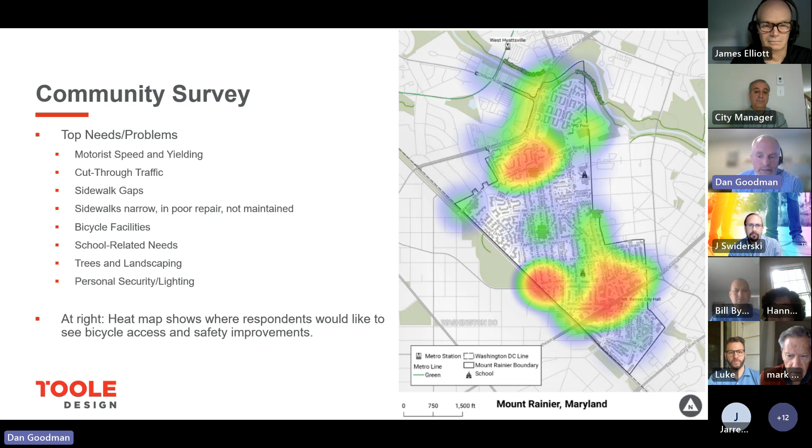And so this is just one example, and I mentioned that all of the results are summarized in an existing conditions report. But we asked the community kind of the top needs for bicycle access safety improvements. And so what you see on the right is a heat map that shows where respondents would like to see bicycle access and safety improvements. Some of the top needs also that were identified in the community survey were cut through traffic, motorist speeding, and school-related needs. And so those are all things that you'll see very clearly delineated in all the policies and project ideas that we'll be discussing.

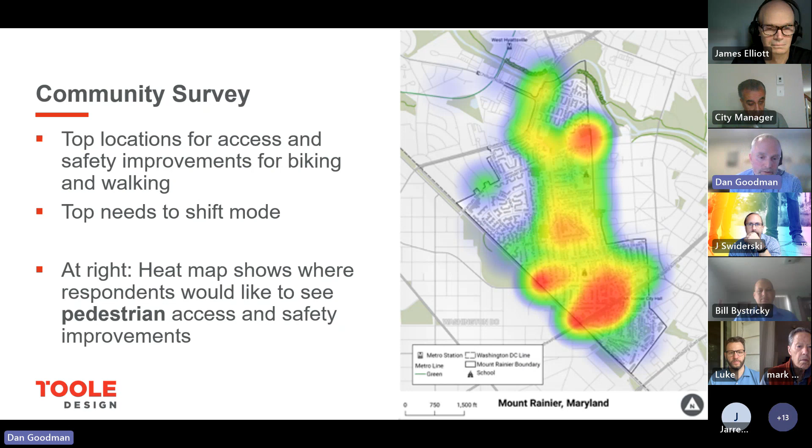This is another example focusing specifically on pedestrian access and safety improvements. And so we did ask for ideas on top locations for safety and access improvements for people walking. And we asked, what would you need in order to choose to walk rather than drive? And we've collected all that information. And what is shown on the screen is a heat map that shows where respondents would like to see pedestrian access and safety improvements. And one thing I want to point out and acknowledge is that this reflects the feedback of the people that participated in the survey. So it's one of many inputs that we're building into our study process.

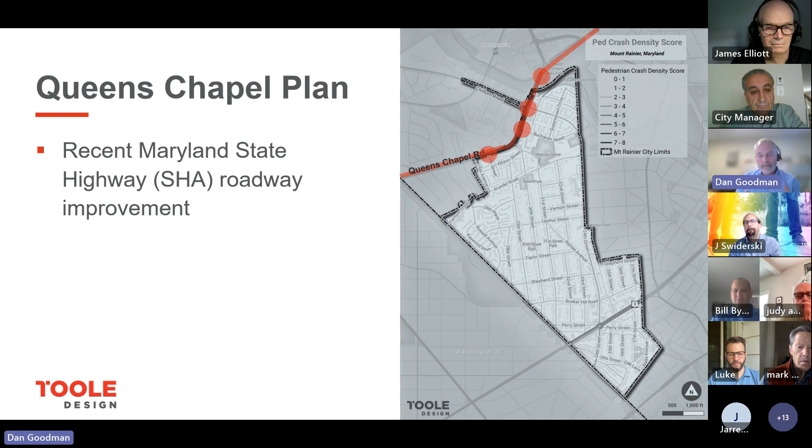So another part of the planning context for this study, as everyone knows, is that Maryland SHA, the State Highway Administration, is also working on a big project on Queens Chapel Road, and so that's something that we are factoring into our study process. You'll see in the crash analysis findings that is one of the big problem locations. That's where crashes are occurring. And so the fact that SHA is wrapping up a project now is a really important development. The improvements that they're doing as part of that project are gonna help the safety story, and so that's a really important part of what we're doing, and we want to fold in what we're doing into that thing that's already happening right now.

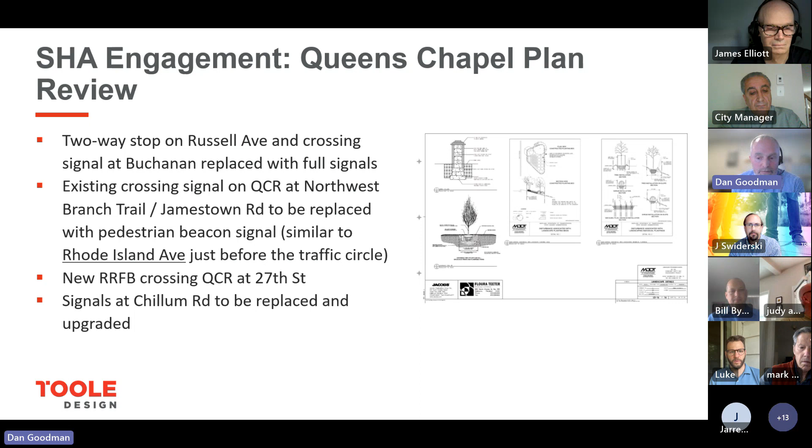I'll say just a few things about the changes that are coming as part of that project. And I'm sure everyone here probably has experienced the construction of that project. But I think that the positive side is what you see on the screen, which is a two-way stop on Russell Ave and a crossing signal at Buchanan are being replaced with a full traffic signal. There's an existing crossing signal on Queens Chapel Road at the Northwest Branch Trail, and so that's going to be upgraded and improved. There's a new rectangular rapid flashing beacon at Queens Chapel and 27th, which is going to improve the pedestrian crossing condition at that location. And then existing signals at Chillum Road are being replaced and upgraded.

A few other important things about that SHA project on Queens Chapel Road. The speed limits are being reduced from 35 to 30. The crosswalks are being marked with high visibility crosswalk markings. The slip ramps are being removed at Queens Chapel and Chillum and 30th. And then bike lane widths are generally going to vary between 6 and 5 feet between 30th and Buchanan. So important multimodal safety improvements, things that will help the overall picture that you'll see in the crash analysis findings, and things that we intend to build on through the projects that we identify in this effort.

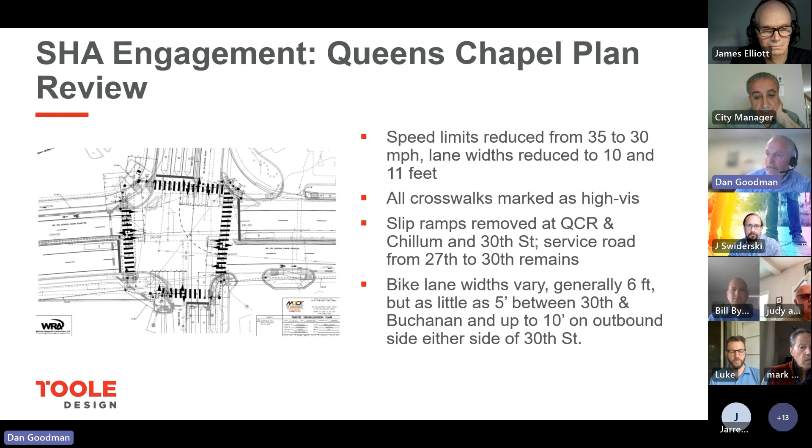So with that, I'd like to pass to my colleague Jay Swiderski to walk us through the findings of our crash analysis that are going to frame up our discussion of policy and projects that'll come next. So Jay. Thanks. So just to start with, a note on our methodology. Sorry, next slide now.

So we looked at data from Maryland and DC, which have open data portals. So we pulled down data on all crashes which occurred in the city of Mount Rainier or on the section of Eastern Avenue bordering the city, and various state and county sources about the roads where they occurred, such as how many lanes and so forth. Unfortunately, the DC crash data contains a lot less information than Maryland's, which is limiting our initial analysis, but we are going to try to go back and look more in depth at the Maryland data and make sure that we have as full a picture as we can get.

But another critical limitation is that this data is based on police crash reports, which may miss some number of crashes, but particularly those involving people walking or riding a bike, and especially people in certain communities who either don't trust police or don't feel that they can afford to call an ambulance, and so may try not to report that. And unfortunately, that means that we don't have the data about them.

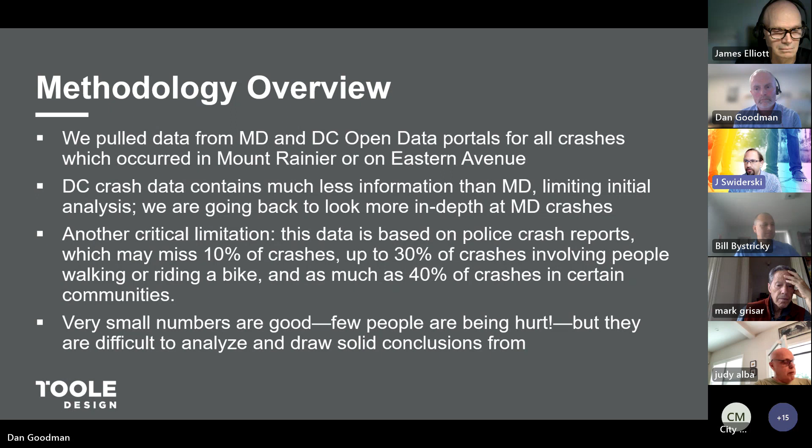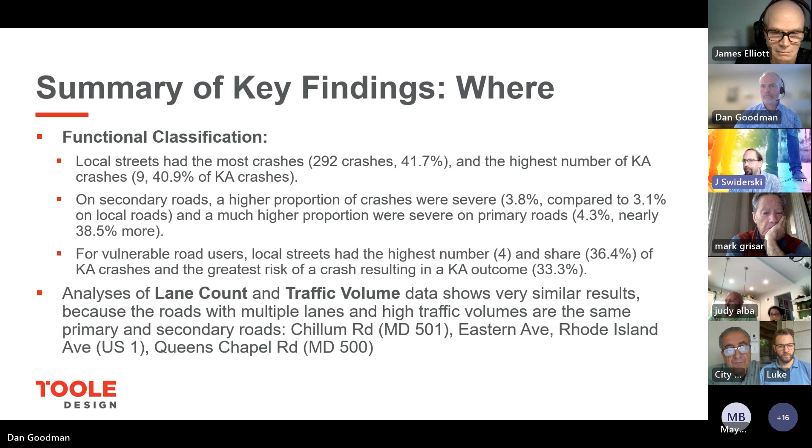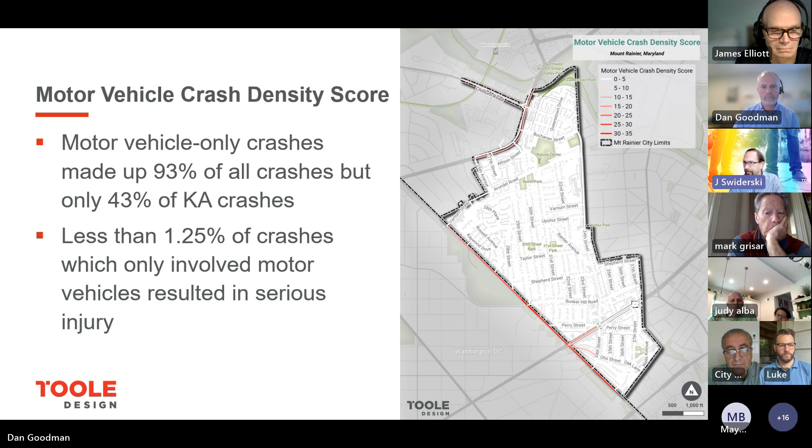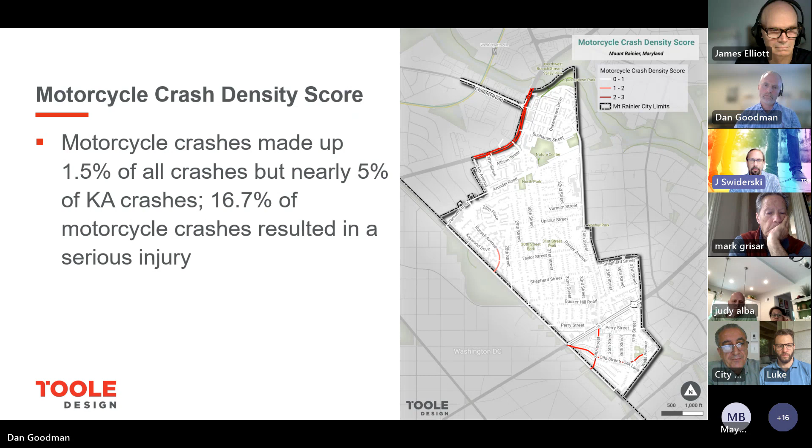Next, please. Looking at motorcycle crashes, again, we see a significant concentration on Queens Chapel Road, with a smaller concentration in the southern part of the city on Otis Street and 34th Street. And again, motorcycles were a smaller percentage of crashes, but a significantly higher proportion of KA crashes.

Now, Dan, moving on to the bike crashes. Again, a major concentration on Rhode Island Avenue west of the Circle and on Eastern, and a smaller concentration on Chillum, and again, a significantly higher proportion of bike crashes resulting in serious injury than the crashes overall.

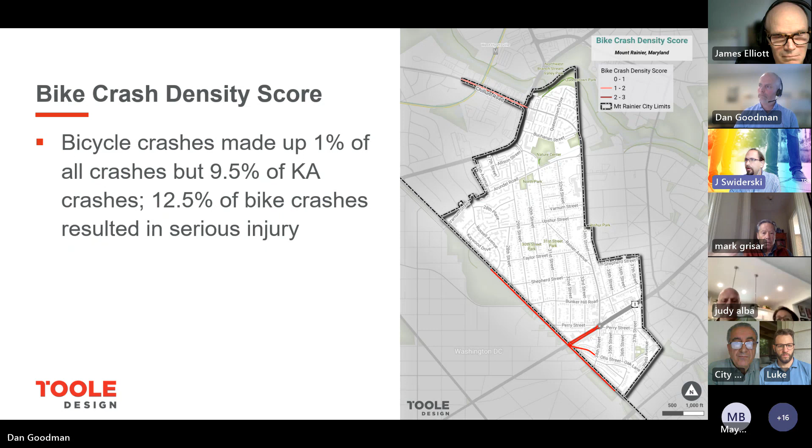Similarly for pedestrians. Next slide, please. Pedestrian crashes were 4.5% of all crashes, but over 40% of serious injury crashes. More than a quarter of pedestrian crashes resulted in a serious injury. And again, the concentration seems to be on Queens Chapel and Chillum roads, with smaller concentrations on Rhode Island and Eastern.

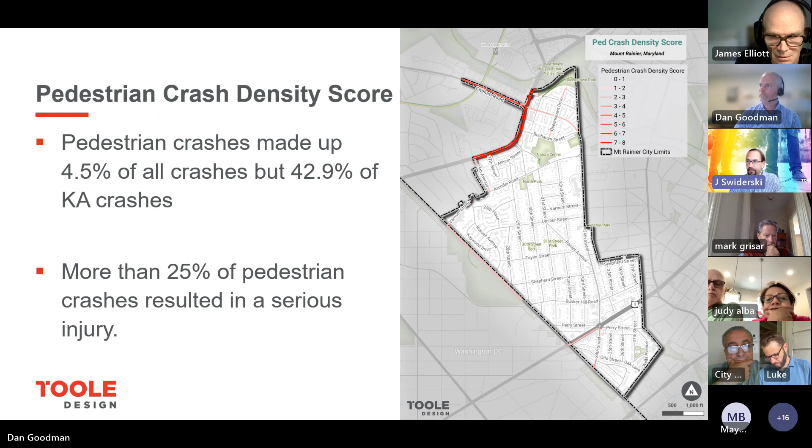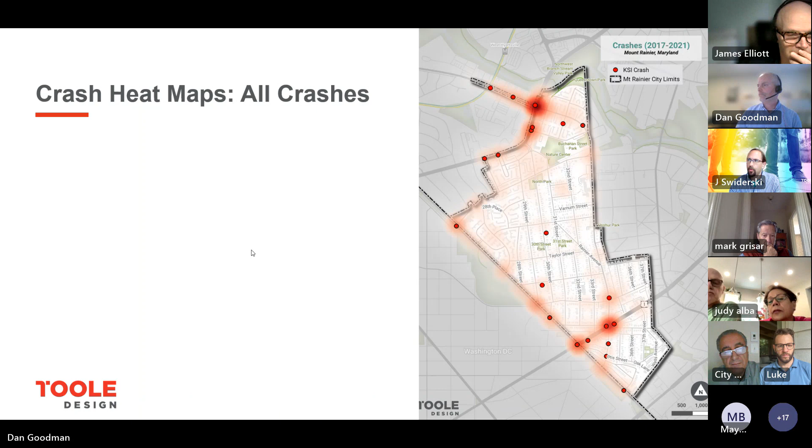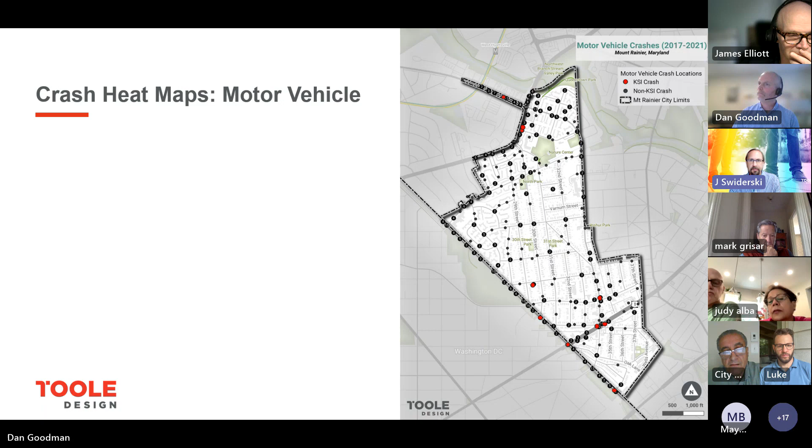We also looked at a heat map of all crashes in the city. And so you'll see, similarly, the concentrations and the significant injuries occurring primarily on Rhode Island Avenue and Queens Chapel and Chillum. And we wanted to include these next couple maps to show that the largest numbers of crashes are occurring on these major roads at the edges of the city. But we do have incidents occurring really throughout the city.

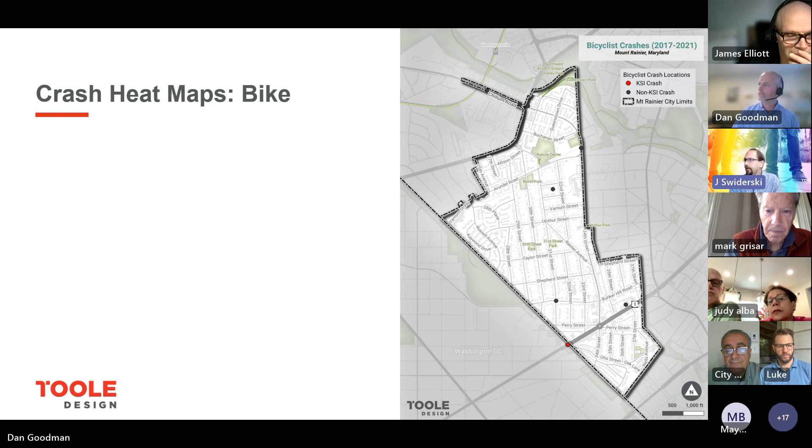So the motor vehicle crashes are spread across the city. Motorcycles in a fewer number but particularly concentrated. And then bike and pedestrian also occurring throughout the city.

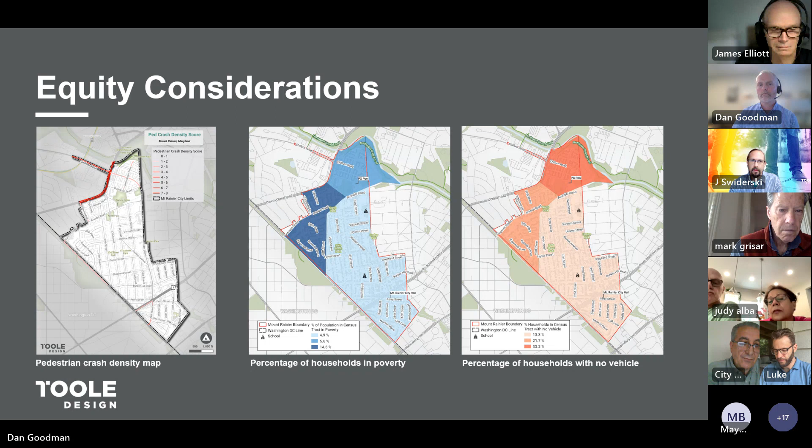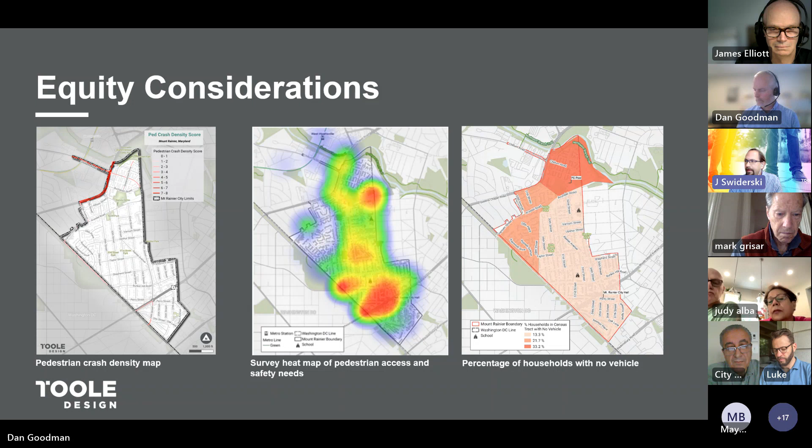And so when we compare that with the crash density map, especially for pedestrians, we see that the pedestrian crashes are concentrated in the area where people, and particularly people who have no vehicle, are concentrated. And if we go next to, Dan mentioned the survey that we did earlier in the year showing where people would like to see access and safety needs. In many ways, that map doesn't match. And that doesn't mean that those areas aren't also problematic, but it does suggest perhaps we need to do better at hearing from people in the north and northwest part of the city.

And I believe next is Jim for policy options. And do we want to stop and allow people to ask questions at this point? Some questions have come in through the chat, and I imagine there are others. Sure, we can do that.

Okay. So one of the questions I wanted to acknowledge that came in through the chat, I don't know if people are monitoring it closely, is why we are reporting on fatal and serious injury crashes or referring to them together.

And it's because a serious injury crash, in the context of Vision Zero, is almost the same thing as a fatal crash—it could easily have become one. So when we say there are no fatal crashes, but Jay keeps referring to fatal and serious injury crashes, that's why. Also, those numbers don't get updated if somebody's condition changes. So if, as we saw recently in DC, somebody is seriously hurt in a crash and dies several months later, that does not necessarily get updated in these statistics to reflect that the crash was eventually fatal.

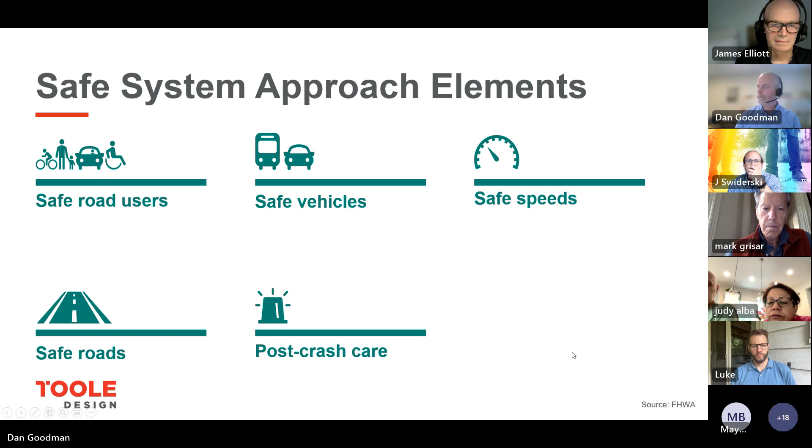So we have developed some preliminary ideas based on the safe system approach elements that I just mentioned. These are preliminary, and I'd be interested in people's feedback about these ideas. Maybe we'll save that until we get through all of these. But I just want to highlight that these are preliminary.

One idea related to safe road users is the idea of expanding the safe routes to school programs at each of the schools. We met with the Vision Zero task force earlier in the week and talked about what's currently happening at the schools. In the initial response, I asked whether the schools had safe routes to school programs already. People weren't sure, but when we started talking about the types of activities the schools were already engaged in, participating in walk to school days, for example, it emerged that Stone and Rainier Elementary are engaged in a number of safe routes to school activities. So it could be a question of expanding those activities.

And I should back up and really introduce what Safe Routes to School is. Safe Routes to School is a federal program that is locally administered to encourage and enable students in grades K through 12 to walk and bike to school. So it's focused exclusively on walking and biking safely to school, and approaches that goal from a number of different angles through improving infrastructure, through providing encouragement activities such as walk to school days, to pedestrian safety and bicycle safety initiatives for students. So it's a comprehensive approach to enabling students to walk and bike safely to school.

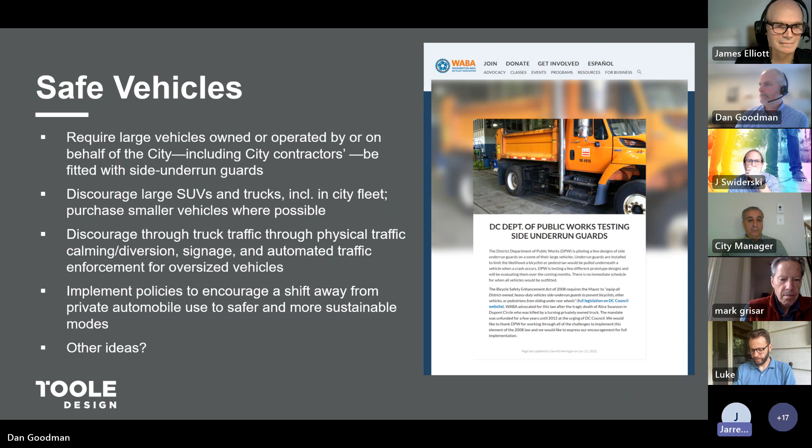Safe speeds—I mentioned that's really critical in the safe system approach. An idea here is to reduce speed limits throughout the city on all local roads to 20 miles per hour. DC recently did this, and it's something Mount Rainier can do too. My understanding from the Vision Zero Task Force is that this has been explored and determined to be possible.

Another idea is to expand the area within which school zone speed limits are applicable. There are certain rules about school zone speed limits, but the school zones in Mount Rainier are relatively small and could be expanded even within those rules.

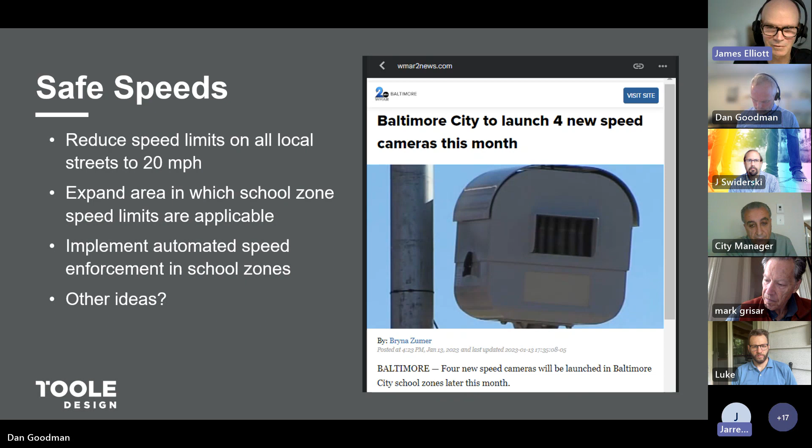A third idea is to implement automated speed enforcement in school zones and residential neighborhoods. Baltimore City, as shown in the screen clip here, has recently launched four new speed cameras in school zones. There's a law enabling cities, if they pass legislation, to install automated school zone speed limit enforcement.

Safe roadways—this is something Dan will put more detail on, but these are the bigger picture strategies the city might take to improve roadway safety on a more systemic basis. One would be to implement gateway treatments at Mount Rainier entry points. Gateways can be configured in various ways, but the goal is to signal to drivers that they are entering a different kind of zone.

That can be done with curb extensions, medians, signage, and other elements. There are a variety of locations in Mount Rainier where that might be effective. One of them is related to the photo shown here: Chillum Road, not too far from Queens Chapel Road. That's an important gateway into the city, coming from Chillum Road north of Queens Chapel, which is a four-lane road and currently quite fast, to a different kind of environment with apartment buildings. We know that quite a number of crashes are occurring on Chillum Road south of Queens Chapel, so this would help address that.

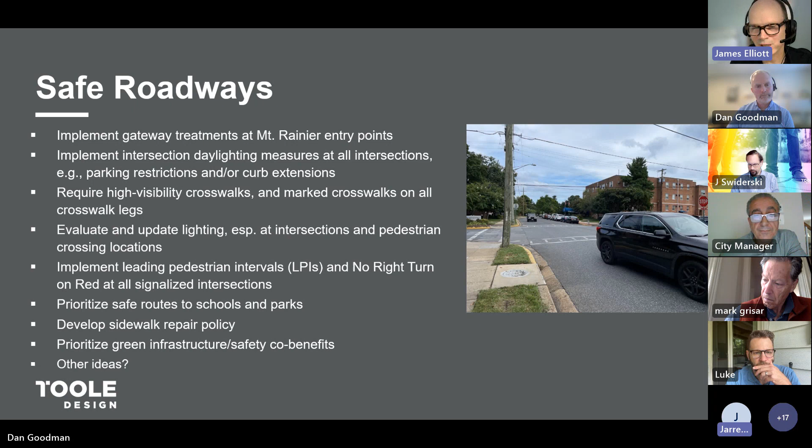Finally, as part of all of this, we understand that it's very important for the city to think about ways that green infrastructure can be incorporated into any type of improvement made throughout the city to address safety.

The final issue is post-crash care—what happens after a crash has occurred. Of course we want to focus on preventing crashes in the first place, but we also want to recognize that they may happen, and the way we respond to those crashes can affect whether a person dies or lives. One of the ways we can improve post-crash care is by doing a better job of reporting and analyzing information about crashes.

So that's one idea for the city. Another is providing training to first responders, such as police officers, on how to manage crashes better. And those are the elements associated with the safe system approach and some of the policy ideas we've developed to address them.

I'm interested in what people think about these ideas. Do certain ideas resonate with you? Is there something missing that you think would be important for the city to pursue in the future? I'm interested in hearing from people, so please feel free to unmute and let us know. And while we do that, Jay, maybe you can look through the comments and see if there's a few you'd like to lay out. But let's first open it up.

It looks like Hannah Grisar. Yes, hi, thank you. I'm curious about any evaluation... your camera lighting might not be exactly right, if you want to bump it up. Maybe that'll help. Whoop, now you're upside down. No, it'll fix, there you are. We go, okay, good. And is the mic better now? Yep, yes, it's fine, okay.

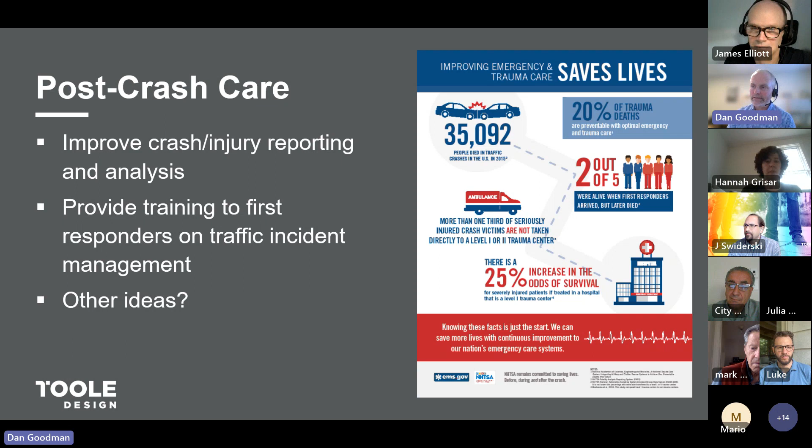Okay, I'm going to recommend that we move along because I want us to talk about some specific ideas for projects. And then we will come back and have a little bit of time to come back to any topics that we missed. So I'm going to move us along, and you can still see my screen, correct? Okay, great.

So the first thing I want to point out: we've talked about the study process. We've talked about the crash analysis findings. We've talked about the policies and program ideas. So those are all part of the story. Another really important part of the story is actual projects on the ground that can achieve the things that we're trying to achieve in this effort, everything that we've talked about so far.

One of the things that we want to do as we're thinking about what those projects are is to build off of the things that are already underway or planned, to actually start to create more of a safe multimodal network. And so we've talked about SHA's Queens Chapel plan, but I also want to point out that there's an Arundel Road Green Street project with improvements planned. There's intersection improvements at Bunker Hill and 34th, and then there's Perry Street, 31st Street intersection improvements.

And so those are things that are coming that we want to build off of as part of the projects moving forward. And so before I move on, I want to mention a couple things that we're trying to accomplish with these projects. Number one, building off of existing projects. The most important thing is improving safety. We also want to tee up sets of projects that would be appealing to the US DOT decision makers when they decide who gets SS4A money.

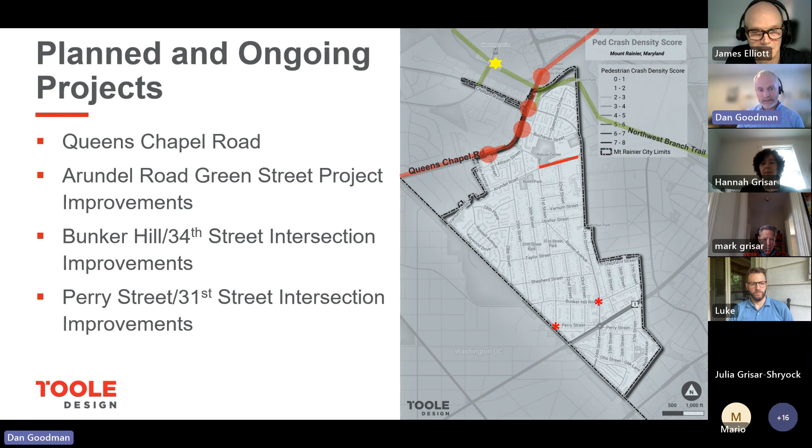And so that's also part of the story that we're trying to suss out, is the projects that help us achieve all of the different outcomes. And so the first piece that I want to mention, and you'll see a hashed box around each of the types of projects. I'm going to talk about 5 of them. So the first one is Chillum Road between the Metro Access Trail and Queens Chapel Road intersection.

So I'll talk a little bit about this concept of a road diet. What that means is a roadway reallocation. The concept that I'll show a picture of is whether we could go from 4 travel lanes, 2 in each direction, to 3 travel lanes, and then better utilize that existing space to meet the needs of all roadway users, like we've talked about. That would improve West Hyattsville Metro Rail Station access conditions.

And as part of that, we think there's an opportunity to significantly improve pedestrian safety, potentially to provide separated bicycle facilities. Access management is part of the idea. It's basically the idea that every single driveway along a corridor is a potential conflict point between a pedestrian walking along a sidewalk and a motor vehicle. And so there may be opportunities to consolidate and combine driveways so there's fewer potential conflict points. We've also talked about green infrastructure.

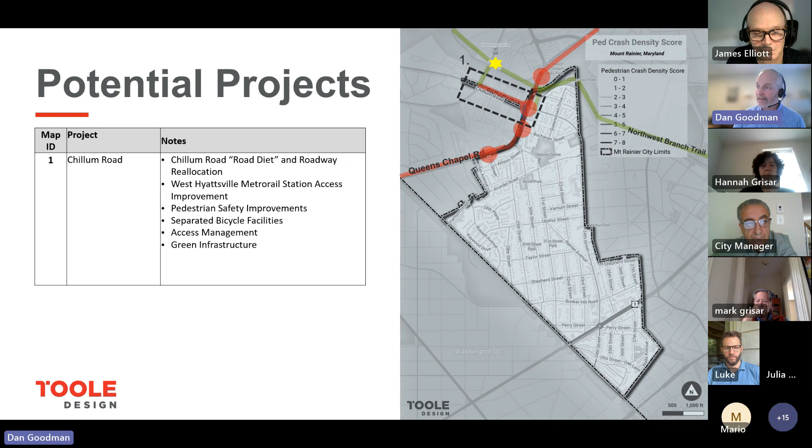But this is the section of road that you all know well, I'm sure. This is where the metro comes out from West Hyattsville. There's 2 lanes in each direction. There's a pedestrian and bicycle crossing with a crosswalk. But when we think about that overall space, one of the things that really stands out is how much of the overall roadway width is dedicated to motor vehicle travel, and what that leaves for everybody else. When you dedicate all of that space for 2 lanes in each direction, how small that sidewalk is, how there's no dedicated bicycle facilities.

And we haven't done a full detailed traffic analysis, but in our initial assessment, it looks like it's possible to go from 4 lanes to 3 lanes. And then, like I said, that would allow us to reallocate some of that space.

So this is just driving towards Queens Chapel Road, and I'll just point out the driveway condition that I talked about with all those driveways, some of them right next to each other; one property has multiple driveways. No matter what we do on the pedestrian accommodation, if there's that many turning cars, it can be pretty difficult. And so ideally we would try to consolidate some of those, but we also know things like a car wash that exists there, there's going to be a lot of movement in and out of that space, and that's a use that we just have to acknowledge and recognize and try to design around.

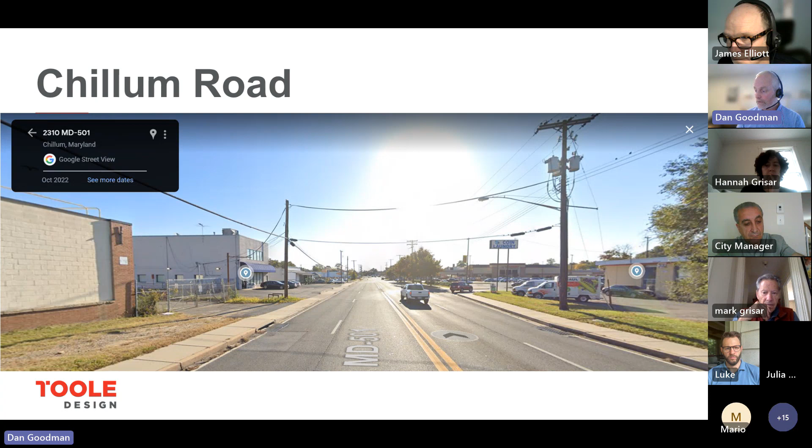So there's destinations on both sides and there's not a lot of pedestrian crossing opportunity. And so I'll mention that another really important reason to try to consolidate the number of travel lanes is that it opens up space for things like a pedestrian refuge island, so that even if there's not a signal, a pedestrian has a place to get halfway across and then assess the safety of making the next crossing.

And that's something we know through the research, which is that the longer a pedestrian is exposed to a crash, the more likely it is that they're going to get hit. It sounds pretty obvious, but if we can provide a pedestrian refuge island, it reduces that exposure, which can have a really important safety outcome.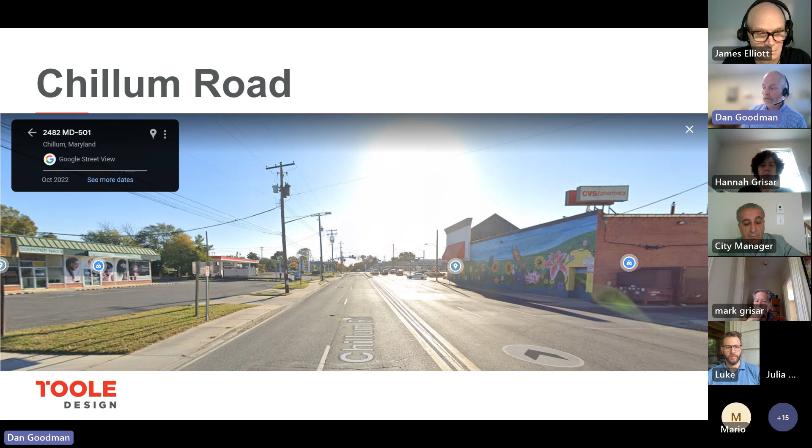And so this is then turning around and looking the other direction. And so you can see the 4 lanes, and if we can go to 3, potentially with 1 lane in each direction and a center turn lane with pedestrian crossing, there's the chance that you could have dedicated separated bicycle facilities, so a bike-only facility on the side of the road that has a vertical separation between the cars traveling and the bike lane, which is different than a traditional bike lane.

So in this case, it would be better if we can have a dedicated separated bike lane. The other thing I want to point out about that is not everybody bikes, and for people that are biking, it's going to be much more comfortable, and we know now that it is going to be safer with a separated bike lane.

But another benefit, if you think about a separated bike lane along the side of the road, is that it provides more lateral separation to the pedestrians also. And so people walking on that sidewalk will have a more comfortable experience if there's a separated bike lane there on the side of the road. And that's also a really important consideration.

So that's a first potential project idea. And maybe I'll pause for a second, see if folks want to weigh in on that concept or that idea and provide any feedback on the basic idea. We had some questions in the chat. So one is, by bicycle facilities, do you mean dedicated bicycle lanes along the roadway? Yes. Yep.

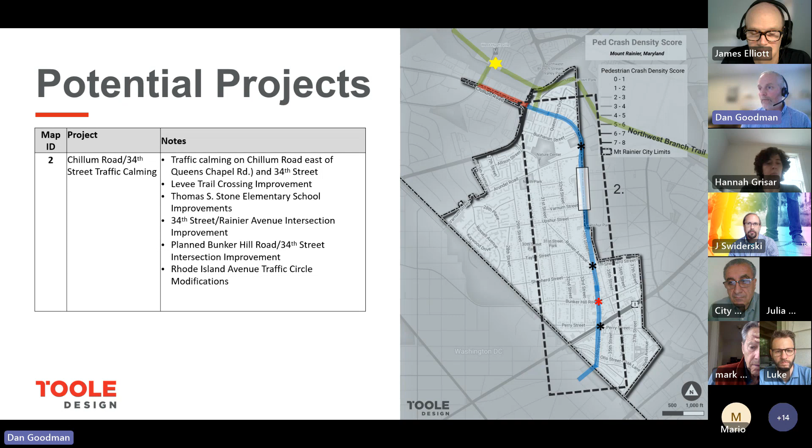There's the 34th Street and Rainier Avenue intersection. We see some opportunities for green infrastructure there, also recognizing that it's slowing the entire corridor down when we have these nodes of more constrained physical space. There are planned improvements at Bunker Hill and 34th, so that'd be part of this story. And then there's obviously the traffic circle at Rhode Island Avenue. There are some potential opportunities to just tweak that to make it function safer. We've got some ideas for that.

I'll just run through a couple slides to talk in a little bit more detail about that section. So you've already crossed Queens Chapel as you're coming into Mount Rainier. And the thing I want to point out here is just how direct and straight that is. That kind of dynamic is what can encourage speeding, because there's nothing stopping you and you can kind of zone out. And we know that this kind of situation can make it easier to choose to speed or not realize that you're doing it.

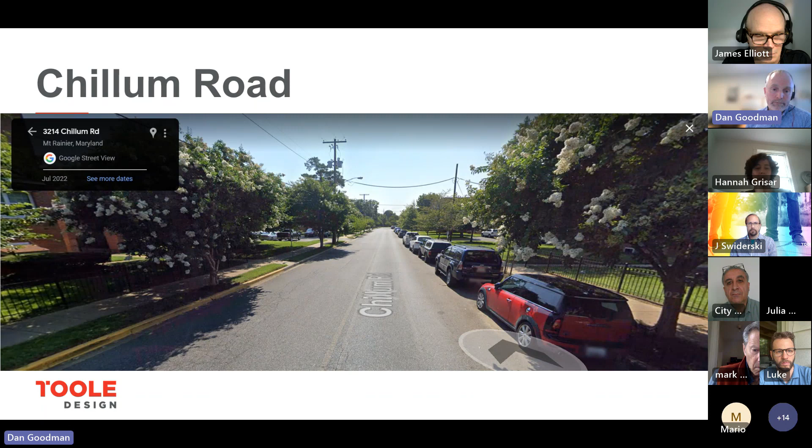And so one opportunity that we'd like to explore is alternating the on-street parking, potentially to push it between the two different sides in order to create a small meander effect or a lateral shift for people driving. And that would, again, intuitively force you to slow down in order to navigate a small weave using the on-street parking, so that you're still providing that parking for the people that need it, but you're trying to slow down motor vehicle traffic.

These are a couple graphics that show you what this looks like. And in this case, it's green infrastructure. It could be a combination of both green infrastructure and parking on different sides of the road, again, so that there's a little bit of movement that has to happen.

You can also do a more focused, we call it a neck down, where you come through a spot and you just realize that it got pretty tight. And that just forces you to slow down and modify your speed. Again, not because a sign told you to, but because the physical environment is intuitively helping you make the decision that we want you to make, which is to slow down.

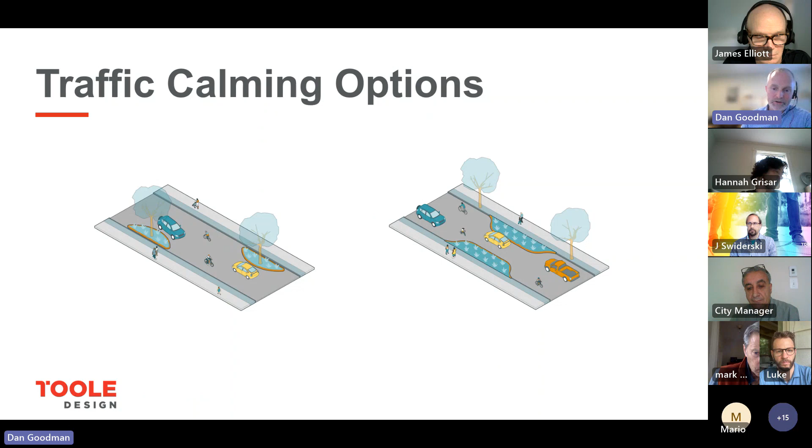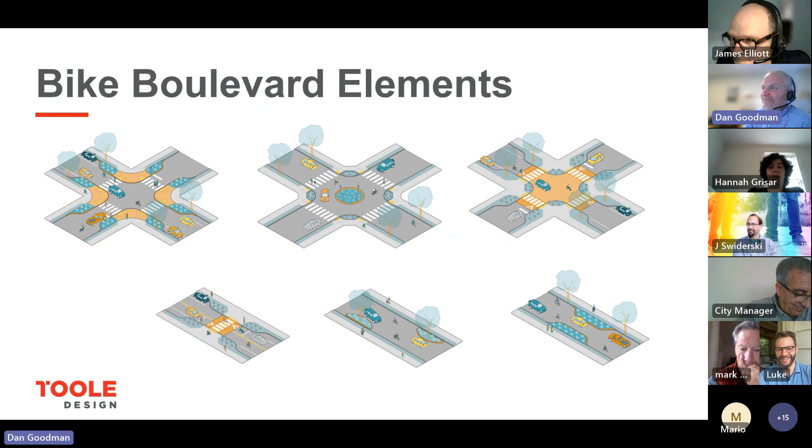Okay, I'm going to do two more, and then I'm going to stop for feedback. The other one, the fifth one, is acknowledging the important role that Bunker Hill Road plays, and looking for a way to really improve that connection, specifically for bicycle access.

Bunker Hill, as it crosses Eastern, becomes a really important connection into the DC network. On the other side, potentially helping us get a connection over to the Rhode Island Avenue trolley trail, or in some other way to push the other direction as part of the Bunker Hill improvement. This would take advantage of what's already planned at Bunker Hill and 34th, and then potentially really focus on that Bunker Hill Eastern Ave intersection, in part in response to the safety analysis, but also to facilitate that connection to the DC bike network.

The last thing I want to mention is a separate batch of improvements, what we're calling systemic safety improvements. As part of this project, as an example, we could make no turn on red at all of the signals at the same time, because we know through research that prohibiting right turn on red improves pedestrian safety. So rather than doing it one-off, one at a time, we'd go and do them all at the same time.

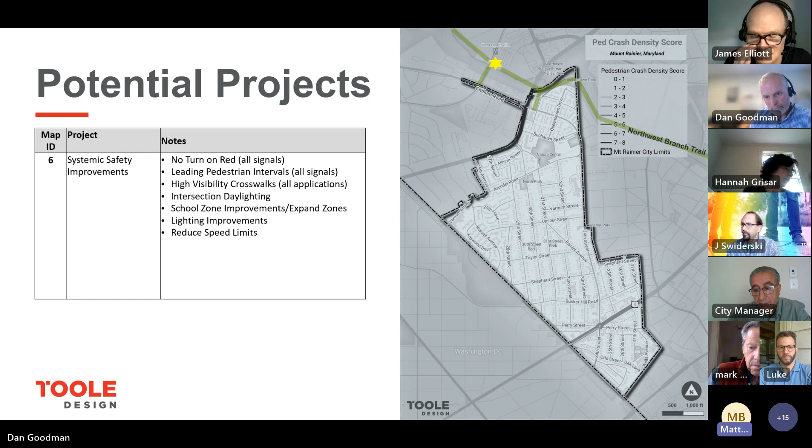It seemed like it connected over to 30th Street. Yeah, if you go to that slide, just west of the Nature Center, I feel like that's a really critical part and also a confusing part for pedestrians and cyclists, because there's a huge intersection. It's just confusing, like who has the right of way and all that sort of stuff. So I don't know if that's part of the plan. It looks like it kind of is, but I think that area connecting north of Arundel to the whatever network happens up there would be really important to nail down.

I just wanted to note that there's a West Hyattsville Queens Chapel sector plan that's in a draft phase by the county. I think it's a plan, there's nothing binding to it really, is my understanding, but it overlaps with that area as well. So to the extent that these project proposals complement that, it might be something worth noting.

Okay, so one thing, we've looked at that. Yeah, go ahead, Jay. I was going to say, one thing I will note is that the current work on Queens Chapel Road is going to include improvements to that intersection at 30th and Queens Chapel, as well as some new signals at both 30th and Buchanan, which should help with calming a little bit that traffic. And I believe there's also some better sidewalks and bike lanes along Queens Chapel.

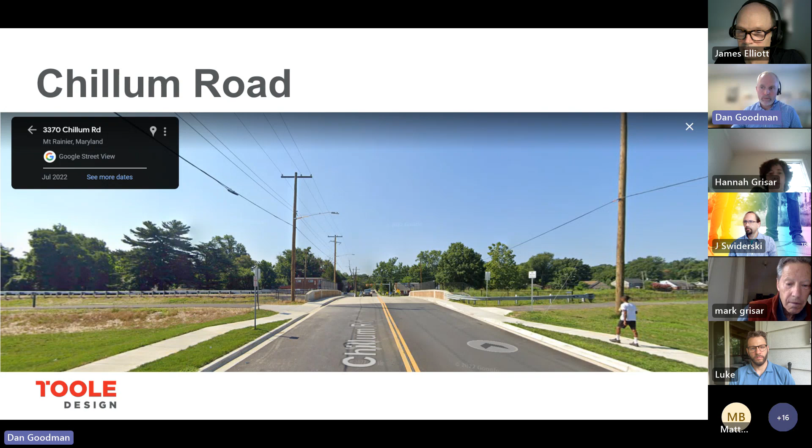One thing I'll mention is that part of what you can expect to see in the overall plan as we start to capture everything you heard about today is really pulling in the leadership commitment shown by the mayor and city council through forming the task force and the Vision Zero policy statement. We'll talk about the planning structure, incorporate safety analysis, and build in the story of engagement and collaboration that's happened in this process, but more importantly, what needs to happen to achieve these safety outcomes. Equity is an important part of our work, so we'll highlight the policy and process changes, strategy and project selection, and a way to document progress and ensure transparency.

As far as next steps, we have another task force meeting on May 25, then council work sessions and legislative sessions at the end of May and early June. Our intention is to wrap up the document at the end of June so the city can write and submit the grant submittal by July 10. We'll continue working over the summer on sketch concepts, taking these design ideas one step forward, and providing a toolbox of systemic interventions we land on as part of this project.

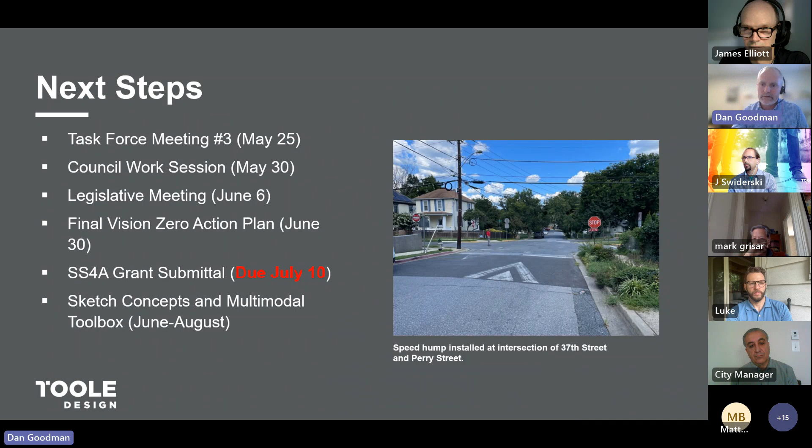So with that, I think we've got a few minutes to go. What I'd like to do is stop sharing my screen and give an opportunity for the city council members or Mr. Kamali to offer any final thoughts on this process and what we'll be focusing on moving forward. Mr. Kamali, Luke, Jarrett, or the mayor is still here as well. I defer to mayor and council.

Selena, did you have anything you wanted to say? If not, I can jump in.

I just want to say thank you to all the residents for your comments in the chat. For those of you who spoke up, the meetings shown on the screen earlier, if you're signed up for city alerts, you'll get an alert letting you know how to join those meetings. So there are other opportunities to see what this looks like as we bring it before the mayor and council, see what we think about it, and you'll have opportunities to provide feedback there. Big thank you to Toole Design. Just really excited about these projects and the potential it has for transforming some areas around town, especially where large apartment complexes are on the northern part of the city.

I think it's creating wonderful corridors that connect us to the larger bike system and the West Hyattsville Metro — terrific job. I want everyone to know these projects are going to cost a lot of money, so that's why we're building the case we can to go after federal funding. There's no guarantee we're going to get it, so there's no guarantee these projects are going to be existing five years from now. But we're really going to do our best to build the best case we can to go after that funding. Even if we don't get the federal funding, we've already allocated a lot of money in our budget for FY24, and we're looking to do more from our ARPA funds to get closer to $1 million set aside for this work, even if we don't get all the federal funding.